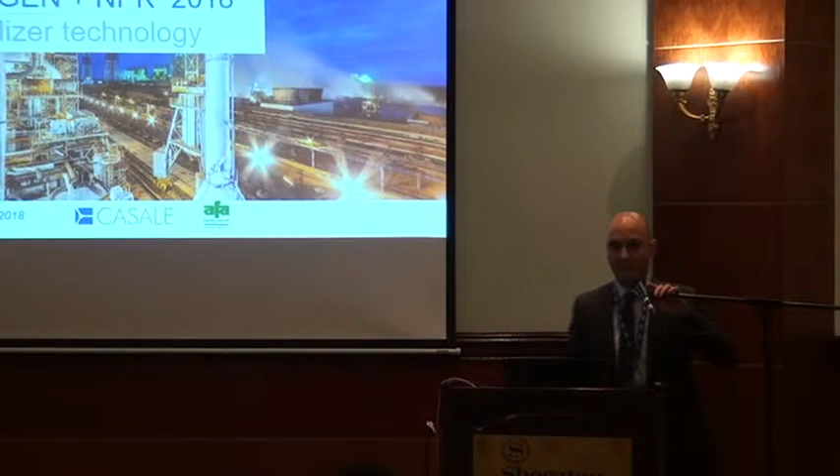Good morning, everybody. As mentioned by Luca, my presentation covers what we analyzed yesterday, the A2000 process scheme, in a practical application in an ammonia plant we have just recently completed and started up.

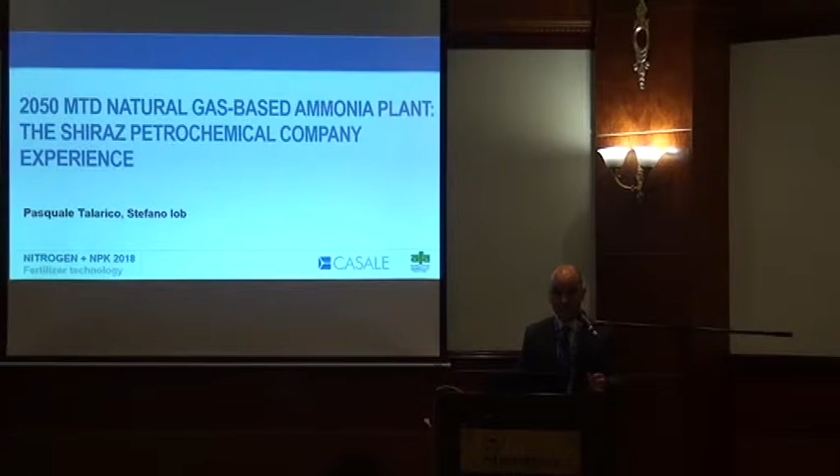It is the 2050 metric ton per day natural gas-based ammonia plant, which we have licensed in Iran to Shiraz Petrochemical Company.

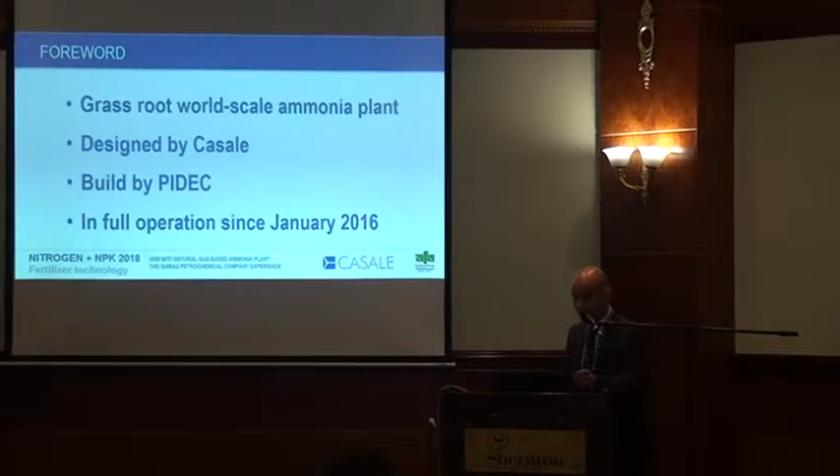The project is a grassroots ammonia plant designed and licensed by Casale, and the main contractor was a local Iranian company based in Shiraz, which is PIDEC. The plant has been in operation since January 2016.

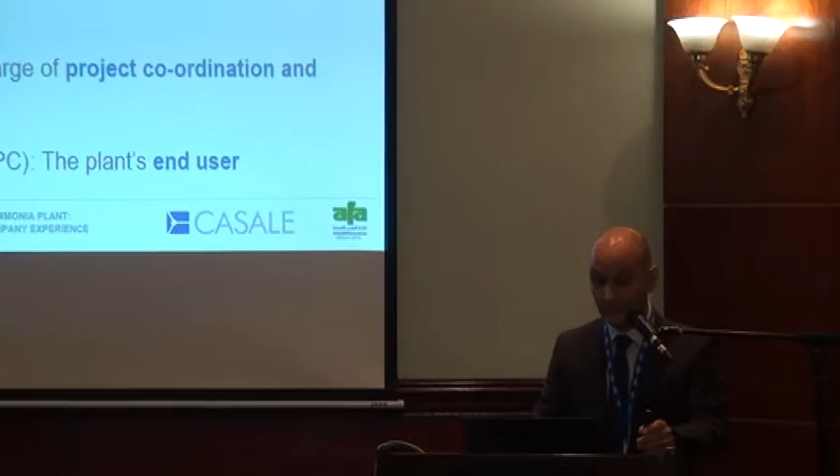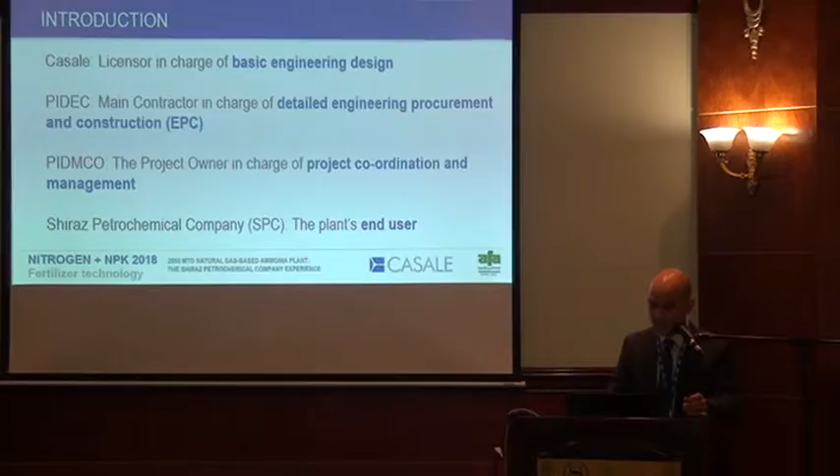Casale is the licensor of the plant, the second plant of this type in operation in Iran. The first one was the Razi plant. PIDEC is the main EPC contractor, responsible for detail engineering, procurement, and construction at site. PIDMCO, the Iranian state-based company, is the owner, responsible for project coordination and management. The end user was Shiraz Petrochemical Company.

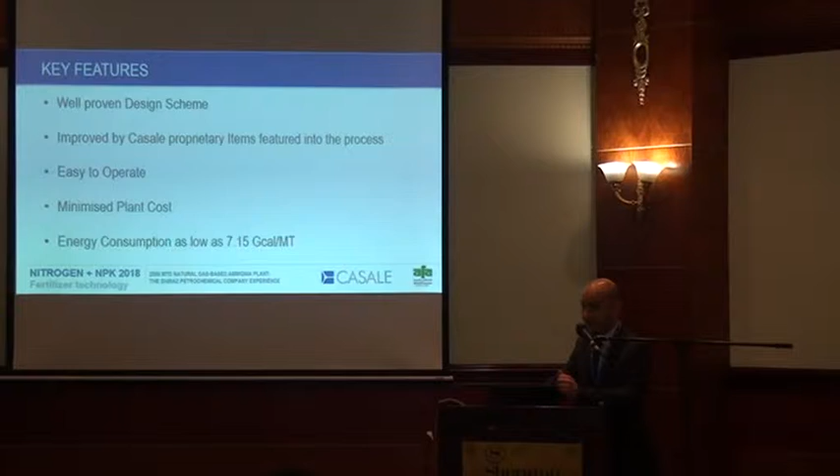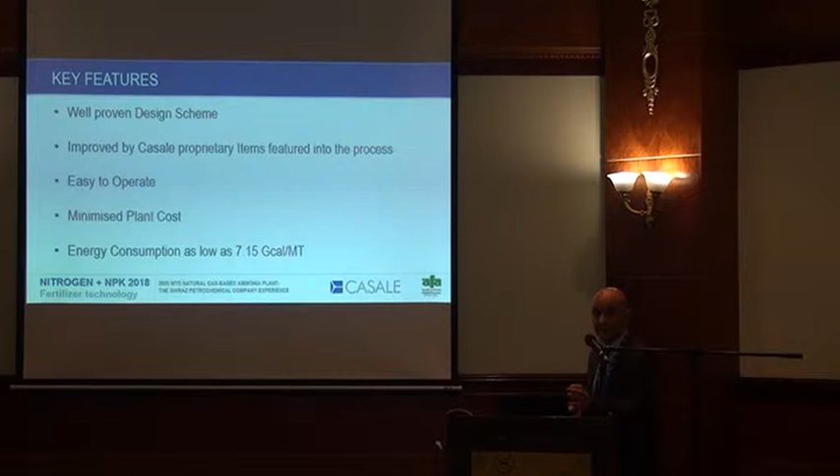As analyzed yesterday, the plant is an A2000 scheme designed by Casale. It is a proven scheme, improved to make it more efficient with Casale proprietary equipment in the key sections. The plant is very simple and easy to operate, and this simplicity brings a plant which is also cost effective, minimizing the capex.

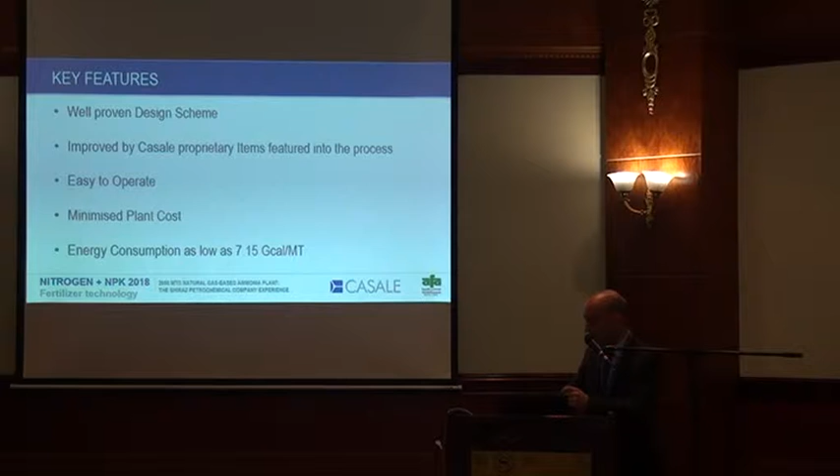The energy consumption we saw yesterday is a proven number, not only calculated. The energy consumption of this plant in the test run was 7.15 gigacalorie per metric ton. We will analyze briefly each section of the plant to show you how our plant looks in a practical project.

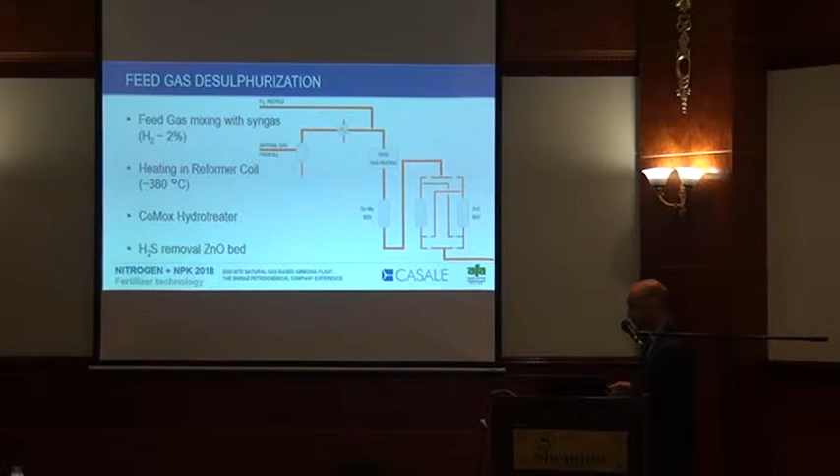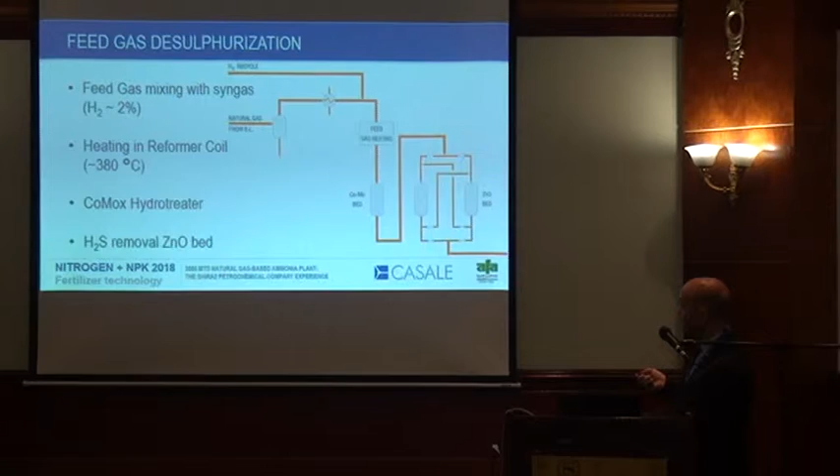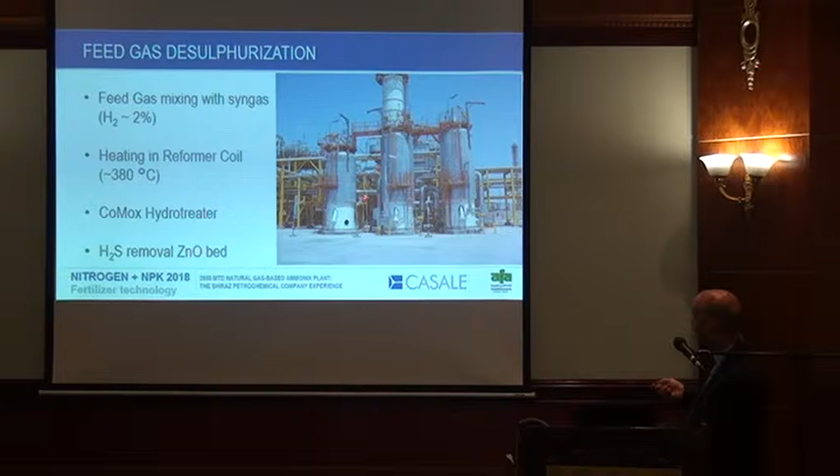The first section is the feed gas heating and desulfurization, heating in the primary reformer section, in the convection section, then the usual hydrotreater and the lead-lag configuration for the zinc oxide beds. This is the picture showing the hydrotreater and the two zinc oxide beds.

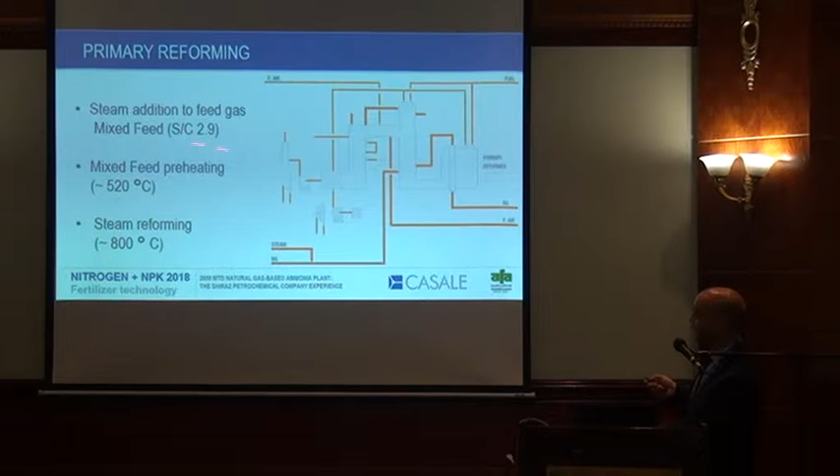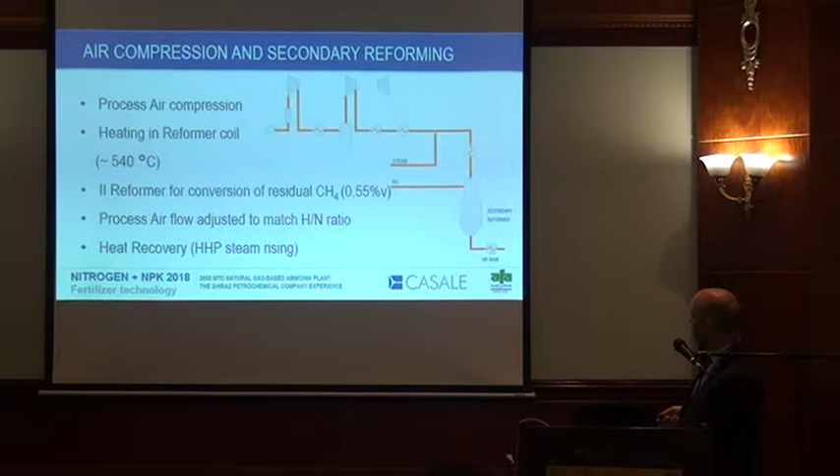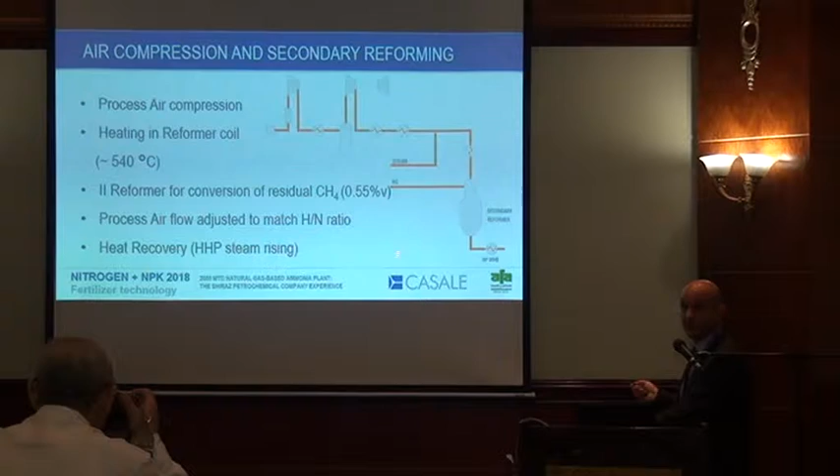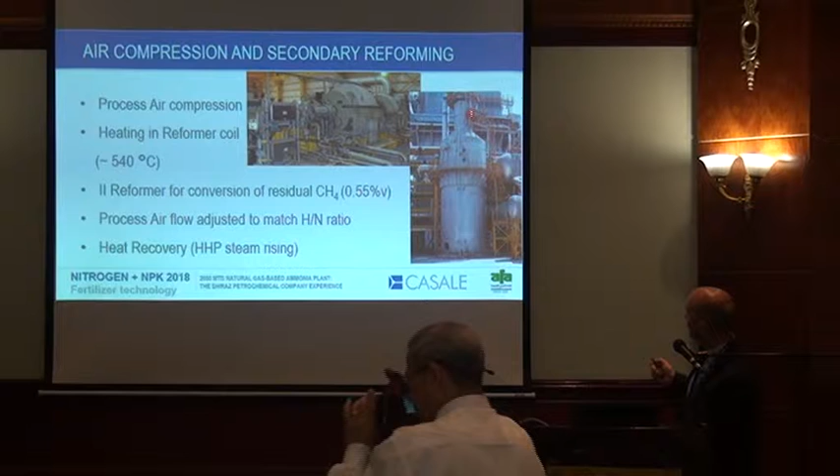Process air compression as well, followed by the secondary reformer. The secondary reformer is, as we said yesterday, equipped with Casale's patented secondary reformer burner, shown in the picture on the right. The top, the neck of the vessel, is the seat of the secondary reformer burners.

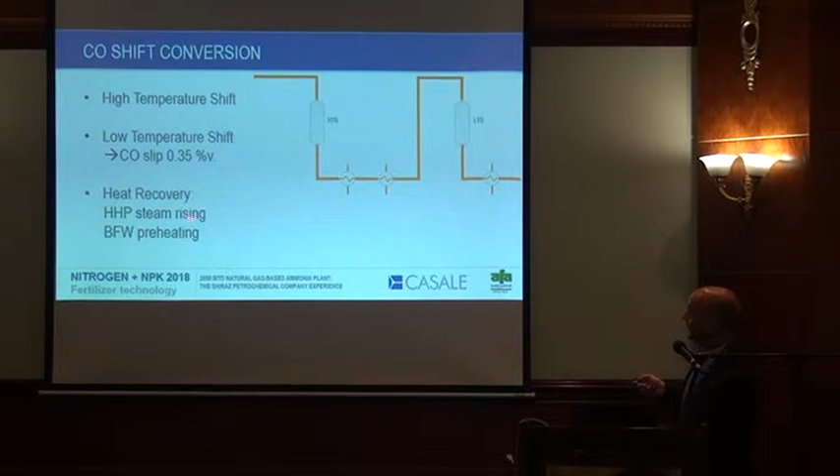Shifting with the axial radial design, as we discussed, CO slip as low as 0.35%, and the heat recovery system in this shifting section is used to produce steam at very high pressure. These are the two vessels for the HTS and LTS.

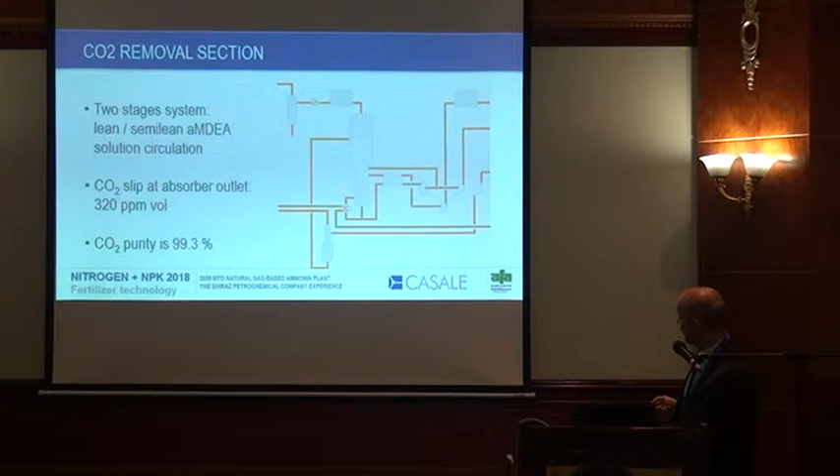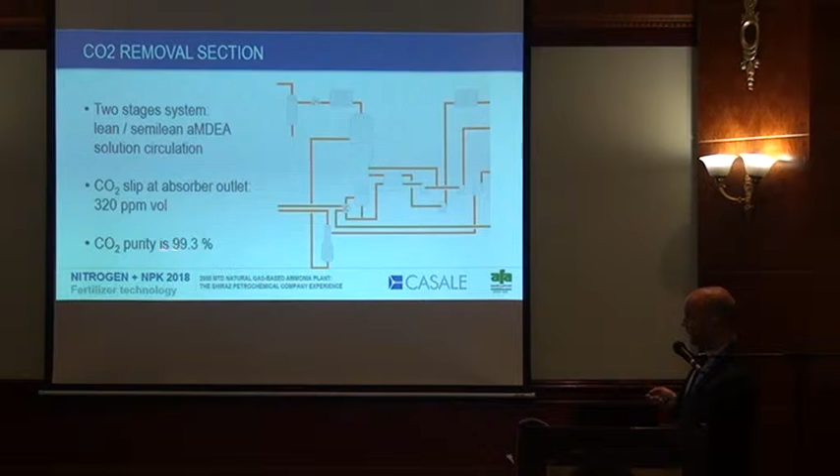The CO2 removal section is based on the aMDEA system. The slip was slightly higher than 300 ppm, and the purity of the CO2 given to the urea is above 99.3%. These are the two columns, absorber and regenerator, for the section.

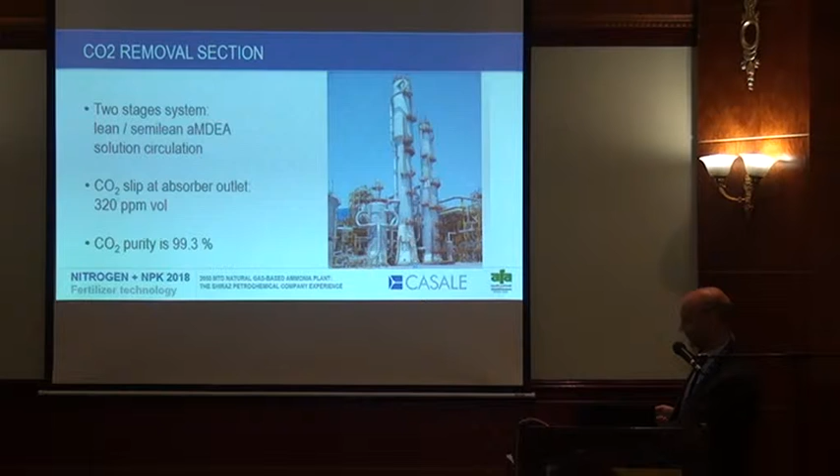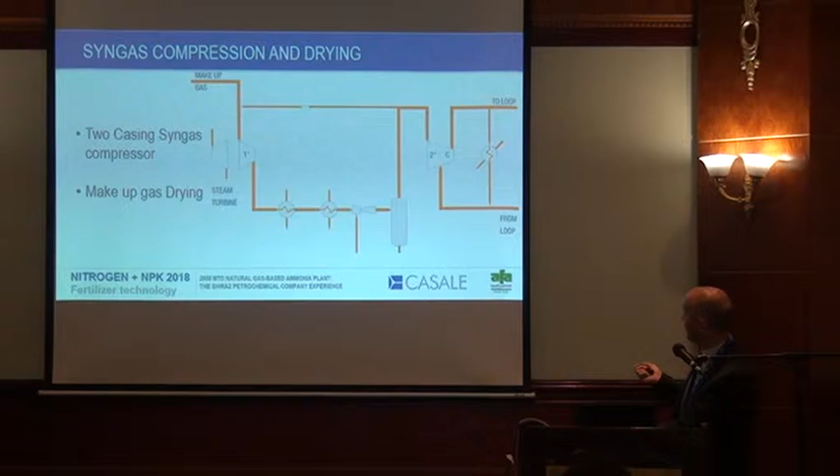The synthesis loop is equipped with our brand 3-bed, 2-interchanger converter. The pressure of the loop is lower than 160 bar, and we are talking about 2,050 metric tons per day, with conversion around 20% ammonia. Just to give you an idea, the catalyst volume is approximately 120 cubic meters.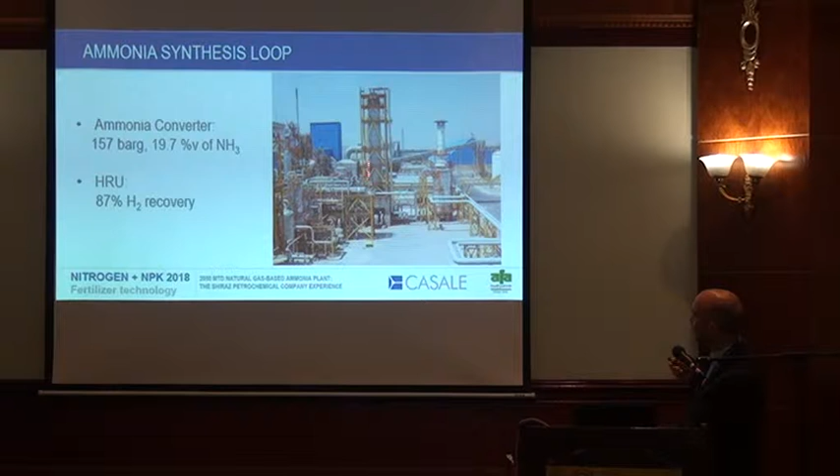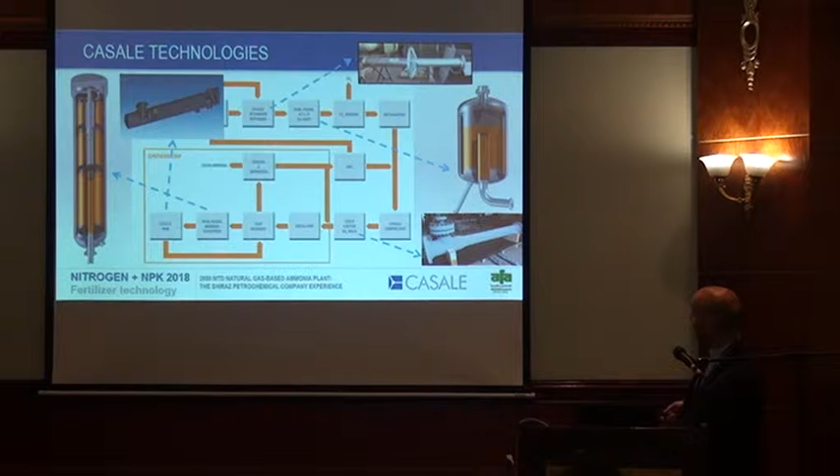So this is a graph we already saw yesterday, the standard A2000 process scheme, enhanced with proprietary equipment by Casale in the key sections of the plant. We have talked at length yesterday about this.

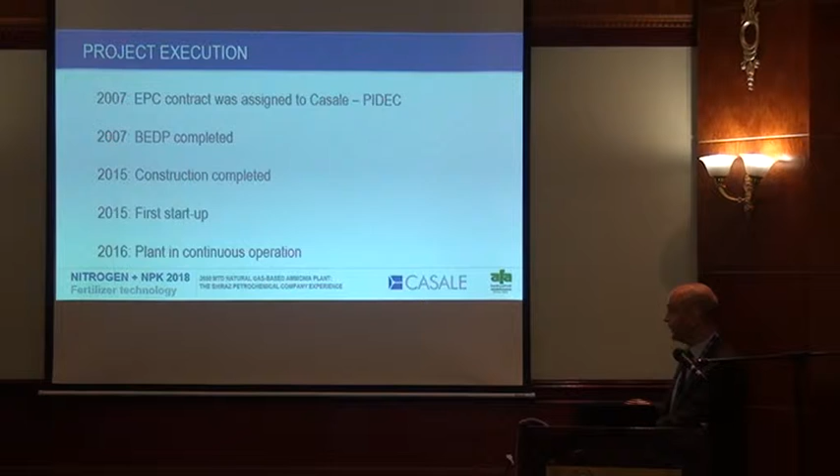A couple of words about project execution. The contract was awarded in 2007, and we completed the basic design in the same year. Then, up to plant startup and continuous operation took some years, but you can understand the issue in Iran was not due to any failure of Casale or the EPC contractor - it was a challenging task to complete an ammonia plant like this during the sanctions and blockade.

So Casale's responsibility in the project was the licensing and basic engineering package and proprietary equipment, as we said, but we had a huge and extensive check and approval of the detailed design because of the importance of the project, and because as an approach, Casale always feels responsible for the project.

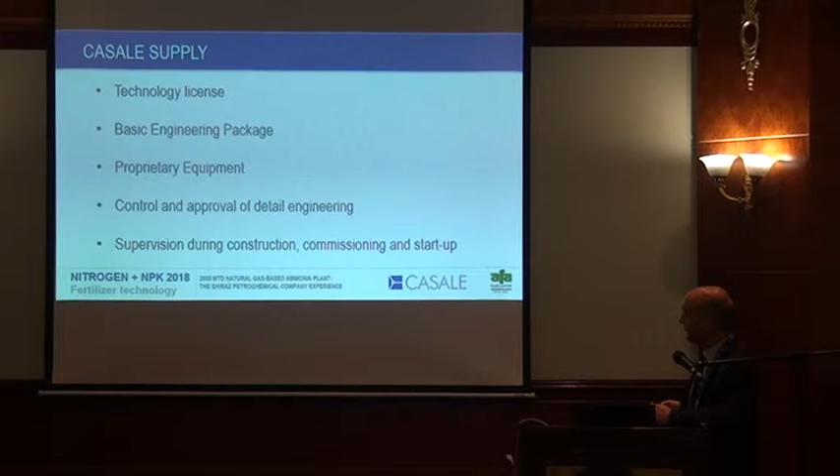So we want to assure the smoothness of the execution. We are involved even in stages where a licensor could be less involved, but we want to assure the proper execution. And of course, we had a team supervising during the construction and commissioning phases.

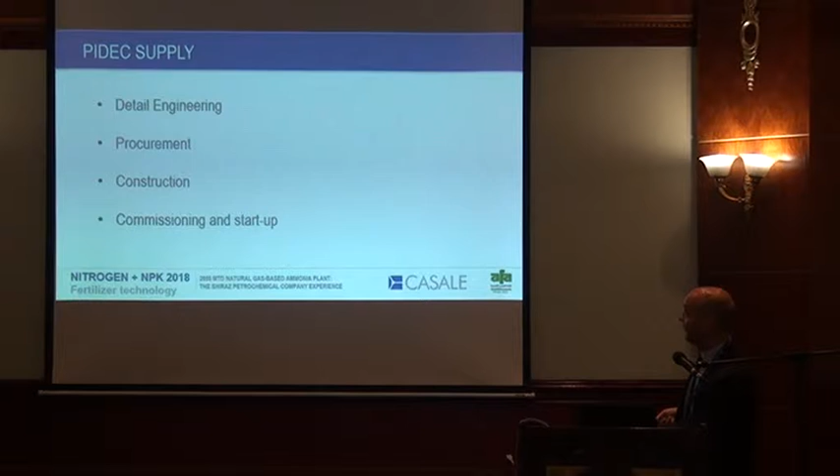Our check in the detailed design particularly was careful in this section for the compressor, for the heavy-duty pumps, all the high-pressure vessels and equipment.

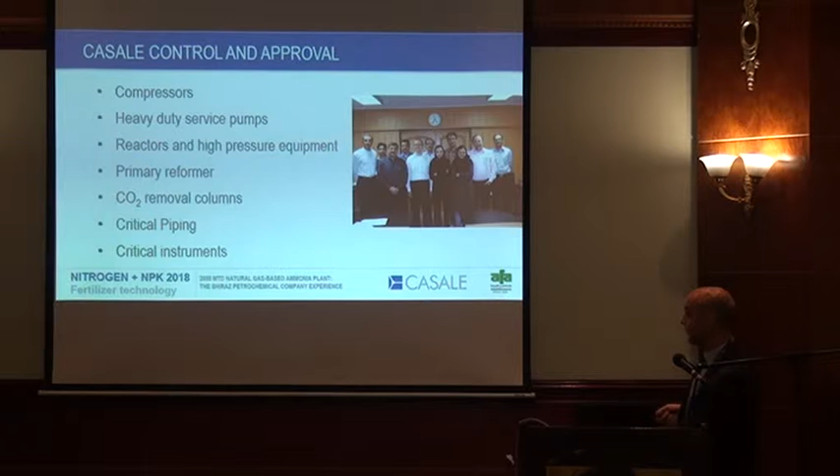As I said, the primary reformer, we followed closely all the procurement of the primary reformer, which is very critical, and CO2 removal columns, piping, high-pressure piping, and also the critical instruments. During startup and test run and parameter optimizations, of course, we were present.

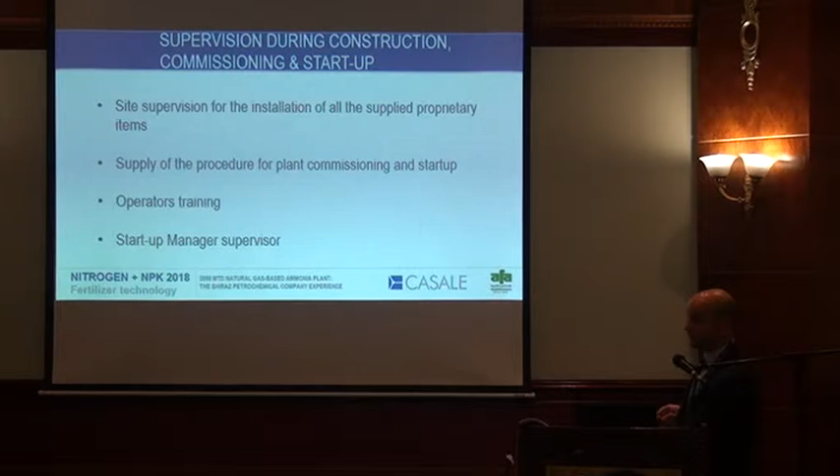We also executed careful operator training, both in a similar plant, different plant, and both on site.

So what this case study shows is that Casale is nowadays a reference licensor for ammonia technology. We have on stream two 2,000 metric ton per day plants like this, both in Iran, and we have under execution three others currently, which will be coming up in the next years.

We have also shown a close cooperation with local contractors. What we feel important for a company like Casale is to develop a close relationship with local contractors, especially in the Gulf area, where there are capabilities for the companies.

We do not impose that the works are majority executed abroad in our company or in Europe. We develop relationships in order to keep local content of the job as high as possible, given the quality and reliability of the project that should be executed.

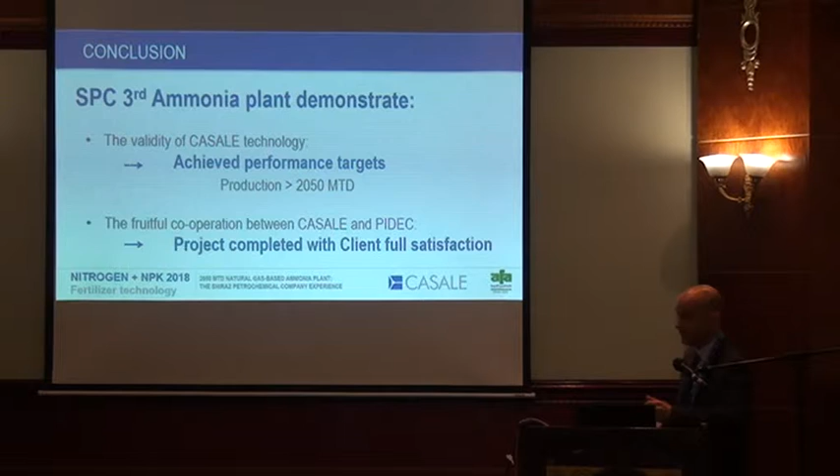So this concludes the presentation, and I leave the stage to my next colleague. I don't know what Luca wants to introduce.

Excellent presentation, Phyllis. I note the scheme of Casale. You install an ammonia washing unit.

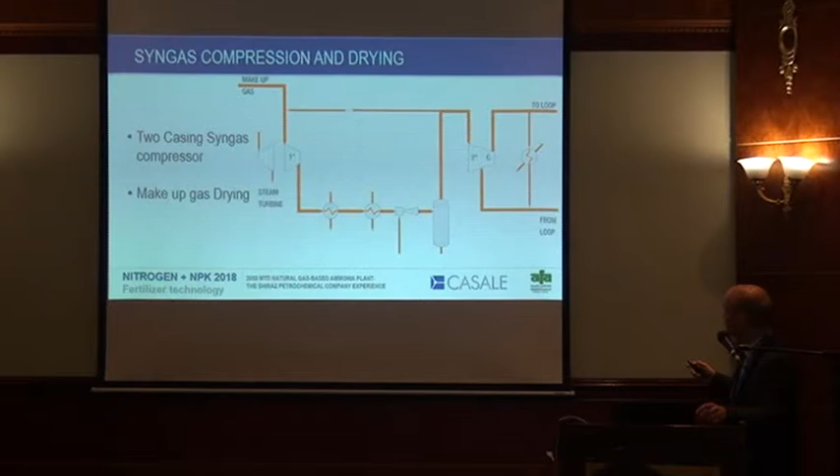No. And also, what is the purpose of this interstage washing ammonia unit? And also, do you depend on water for washing the ammonia? What is the side effect of carryover of ammonia with the gas entering the converter, and the effect on the catalyst?

Thank you, clear. I'll start answering, and then maybe Fabio can go into more details if needed. The ammonia wash is installed not on the recycled gas, but on the makeup gas.

Here we have the gas coming from the methanator. It is compressed in the first stage. So we are around, if I'm quoting by heart, 60 bar in this area.

We take ammonia, which is pumped back from the back-end section. It is taken already in pressure during the high pressure separator, but there is also a pump envisaged in case it is needed from lower pressure. So we have ammonia here.

For a 2,000 metric ton per day plant, we need around 15 tons per hour of ammonia. And this ammonia is contacted in this ejector with the makeup gas.

Here we have an intimate contact between liquid ammonia and gas, so we are able to remove all the water and the oxygenated compounds. The ammonia is then sent back from here to the back-end section, to the refrigeration section at the appropriate pressure.

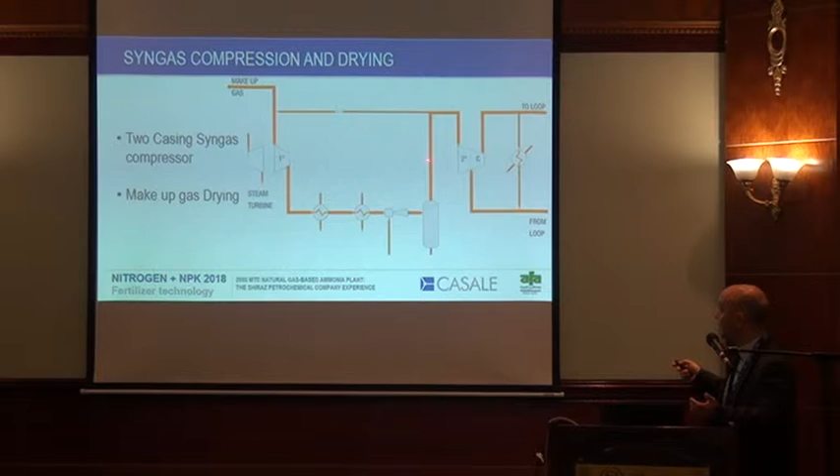And here we have a makeup gas which is free of oxygen. It is, of course, in equilibrium with ammonia, at 60 bar, so the temperature is low. I don't remember exactly the value, but it's even below zero, I think, around here.

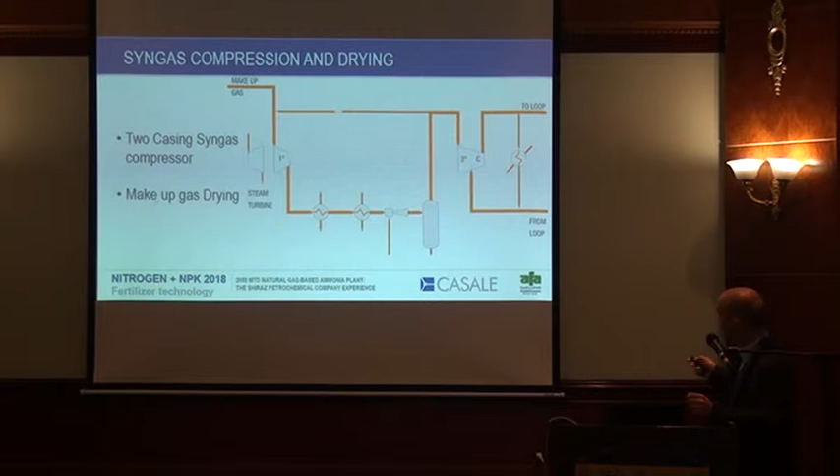So this section of the compressor is very efficient. Then from here, you don't need to...

The syngas and the makeup gas are mixed here, so you send directly the makeup gas to the inlet of the converter. You don't need to feed the makeup gas to the chilling section to go here and go back. So you save energy in this chiller, basically.

You have, of course, as you correctly said, an impact on the catalyst, on the efficiency of the converter, because you have more ammonia than you could have. But again, the efficiency of our reactor can perfectly withstand this fact. So yes, you have a slight impact on the conversion, but thanks to our ammonia converter, you can perfectly cope with this. The overall gain is an energy saving, basically.

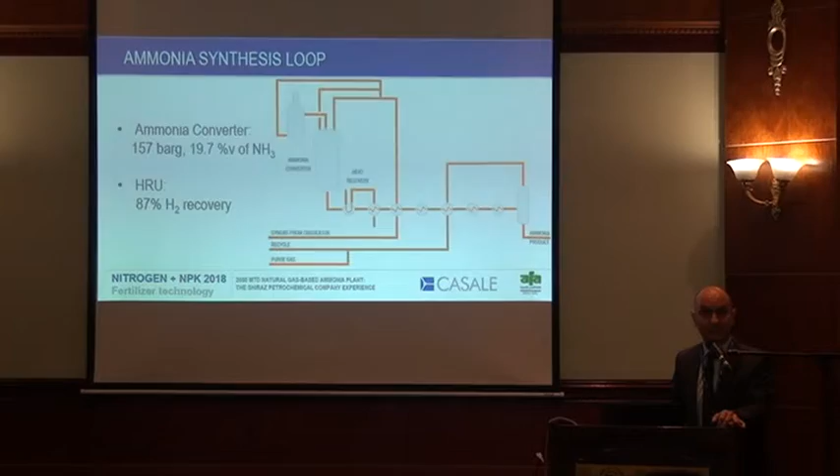I want to know the steam consumption figures before and after installing the ammonia wash ejector. That is a little bit more difficult.

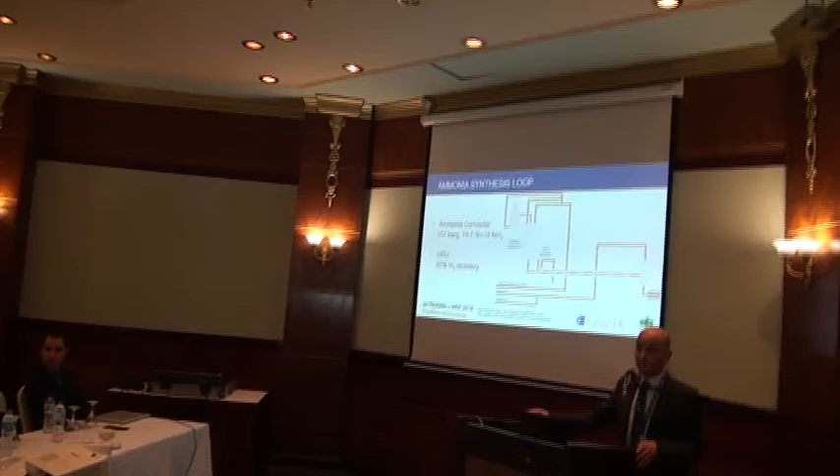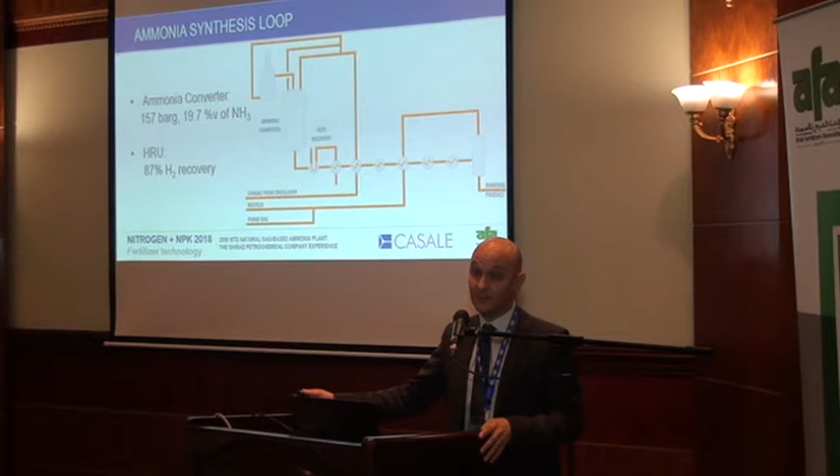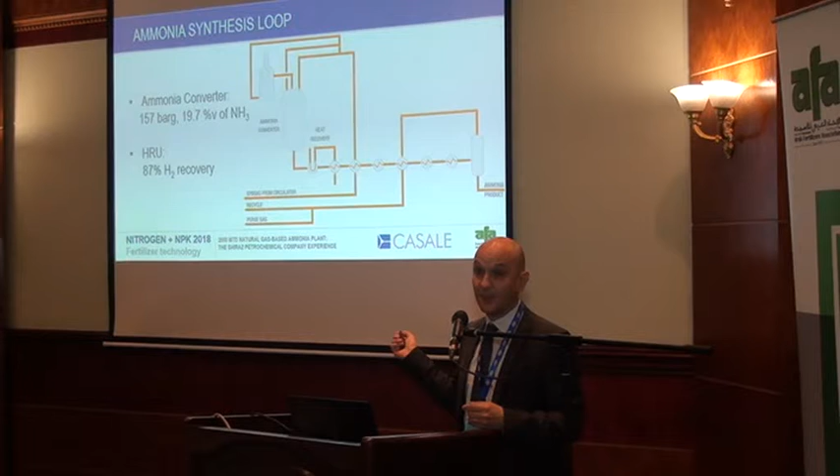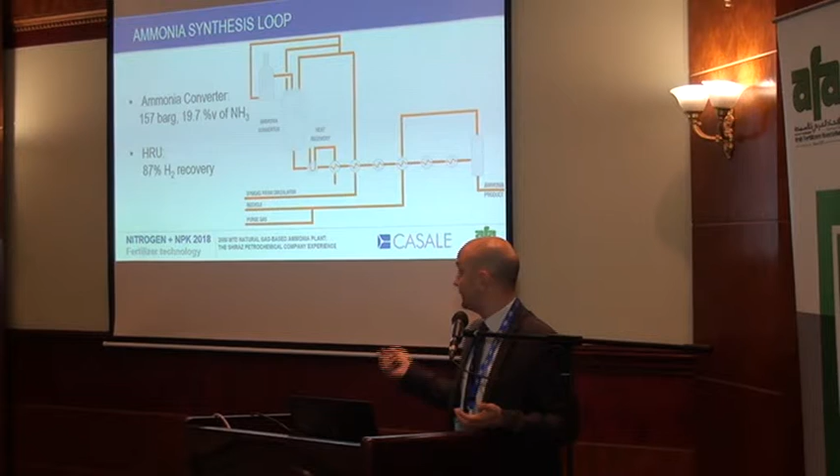In a revamping case, our ammonia wash system historically has shown an energy saving of about 60 to 80,000 kilocalories per metric ton. This is the average energy saving we have seen during a revamping installation, because this has been done since the beginning. So the plant has been designed and conceived with this, but we also do revamping with ammonia wash, and the energy saving is about 80,000. It's not much, but you have to consider this is a very cheap modification.

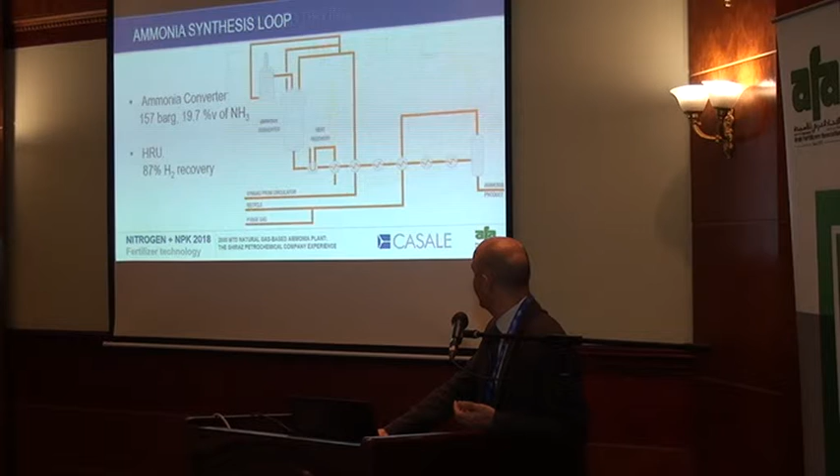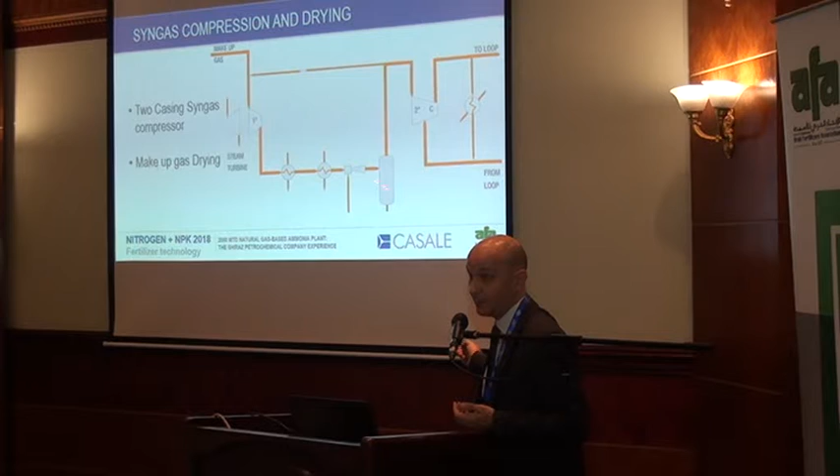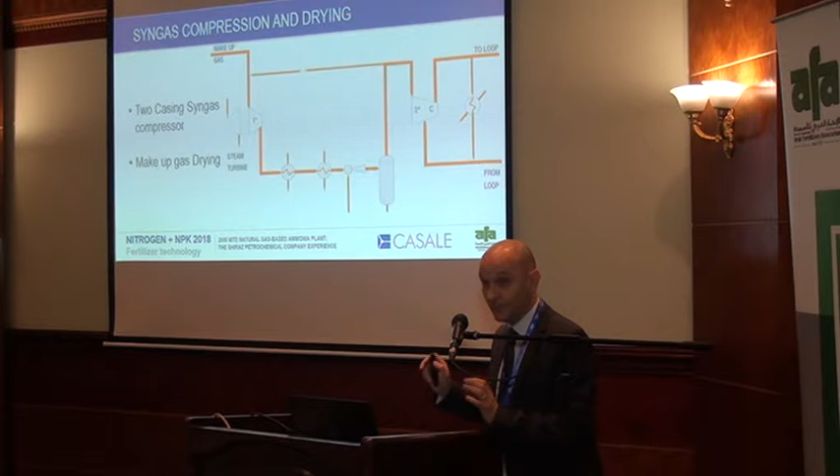You just need to install an injector, which we have seen in the picture. Yeah, it's a simple injector. You have to install a small separator, or maybe the existing one can cope with it. And depending on the design of the compressor, you might need an oil filter, depending on the compressor type. So it's a very cheap revamping, and you get 80,000 kilocal per metric ton of saving.

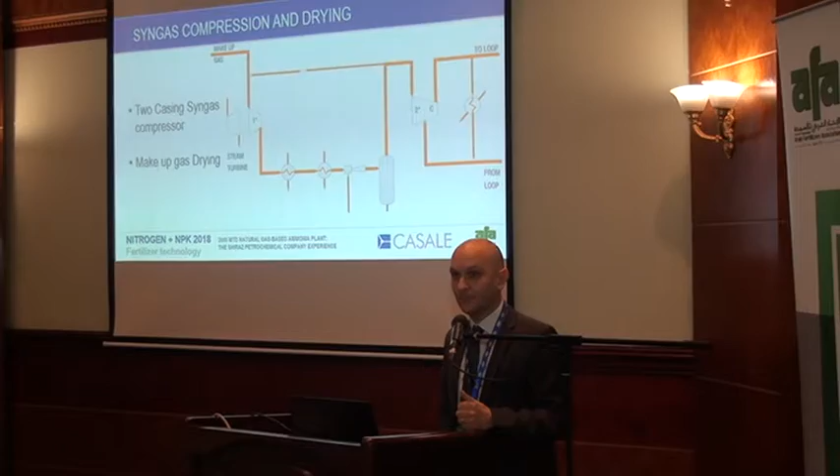What is the route of this ammonia? Will it go to another section for stripping, or will it go to the ammonia product tank? No, this ammonia here will go directly to the tank.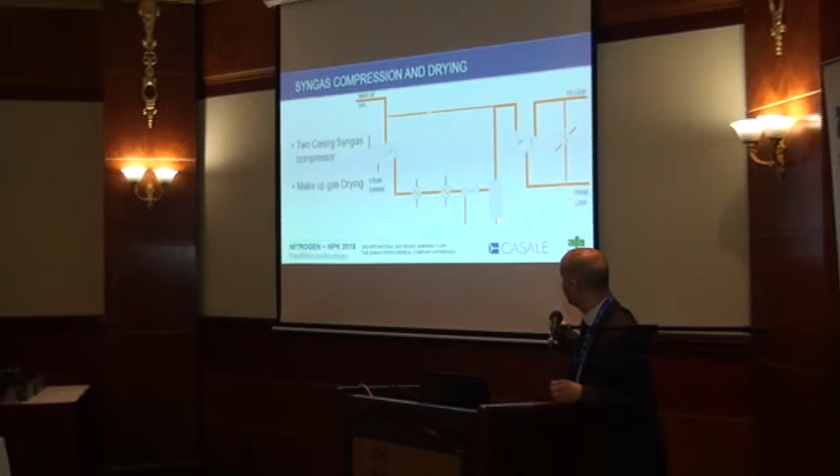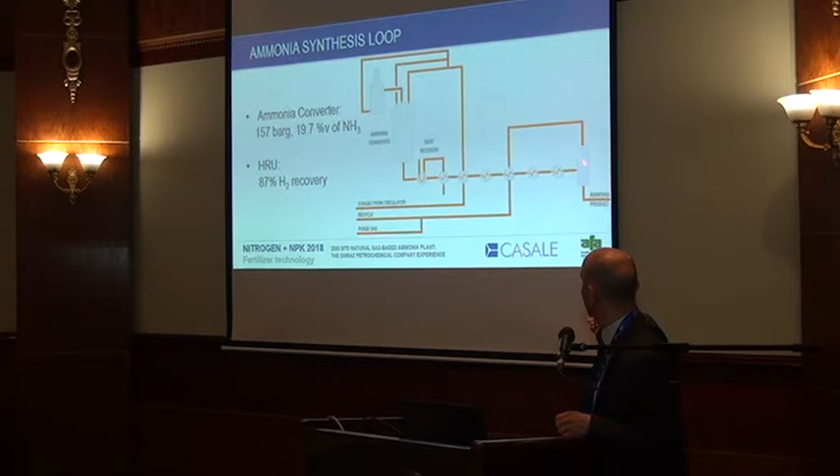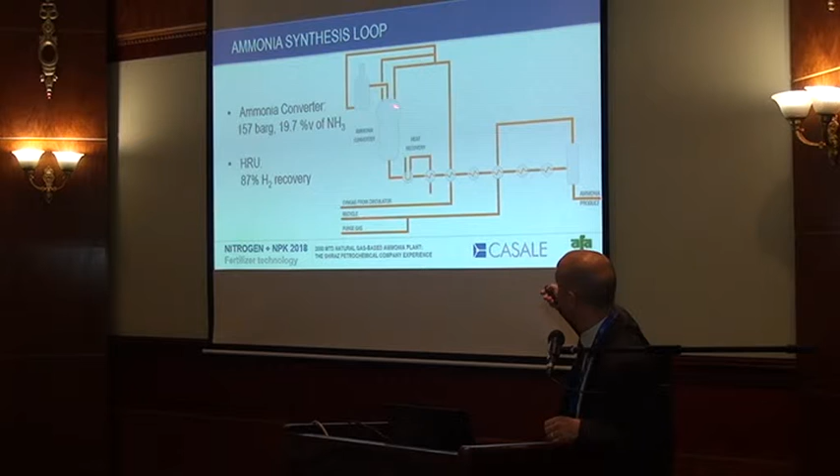The percentages at stake are very limited for this side reaction, so the ammonia will be sent to the final product. Because at the end, what you are realizing here is what you would in any case realize in the standard process: the makeup gas comes in, and the liquid ammonia takes out all the CO2 and all the water before leading to the reactor. So in any case, all the gases separated in our ammonia wash would in any case end up in the liquid ammonia product. There's no difference in that.

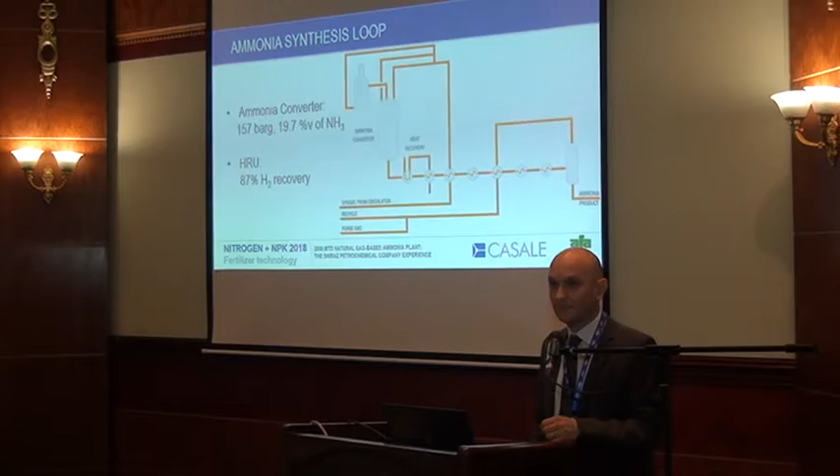You mean installing the pre-reformer in place of the zinc oxide beds? I mean, you would install the pre-reformer still after the zinc oxide beds. You need those beds to remove the sulfur content, and you cannot have the pre-reformer in place of these two beds. Okay, thank you.

We need to know also the same subject: the percentage of ammonia in the makeup gas after this ammonia washing unit, and the effect on conversion. What is the conversion ratio in the ammonia converter?

The percentage of ammonia, I need to check the number. If I recall from memory - it's been a long time since I saw this - it's higher than 3% for sure, at the inlet of ammonia here. I need to check, I have the balance of Shiraz. I will check on my PC and give you the number.

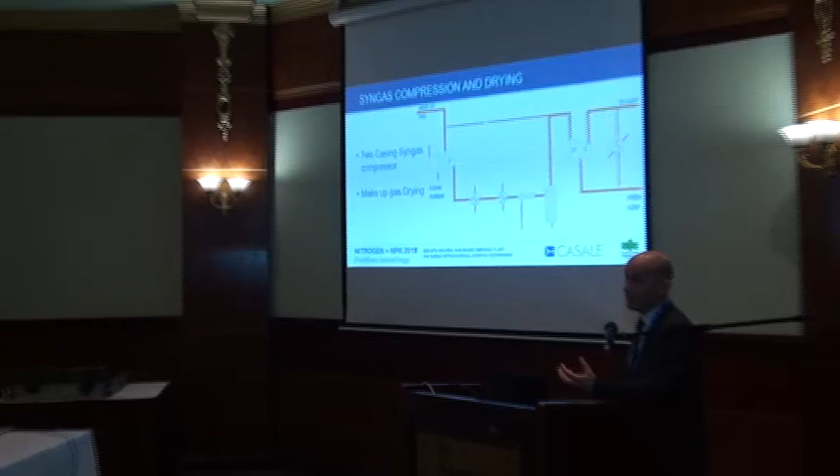I don't remember exactly, I think it's downstream the separator - we install an oil filter with a coalescer, so it's preventing problems in this section. So we know exactly the issue, and it's a way to solve it. We have installed this in several plants, so there's a possibility to visit those plants.